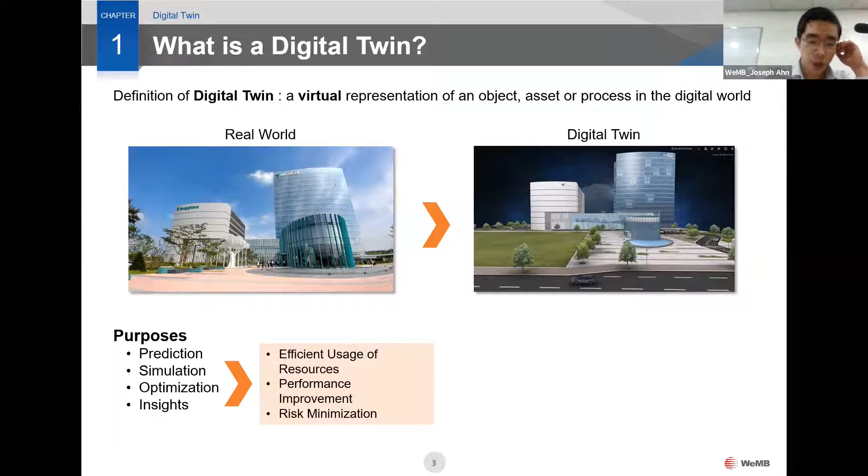Though figures are slightly different, prestigious researchers expect the digital twin market to grow 62% every year on average, with the market size reaching almost $30 billion by 2025. Among the world, the Asia Pacific market is expected to grow the most and fastest.

So, application of digital twin - where can this technology be used? Nowadays it's hard to draw a clear line. It can be used even in healthcare, hospitality, universities, etc. But the fields where the technology is most used are, no doubt, machine testing, because it started with GE, which manufactures machines, to test their performance or simulate outcomes. Also smart factory and smart building.

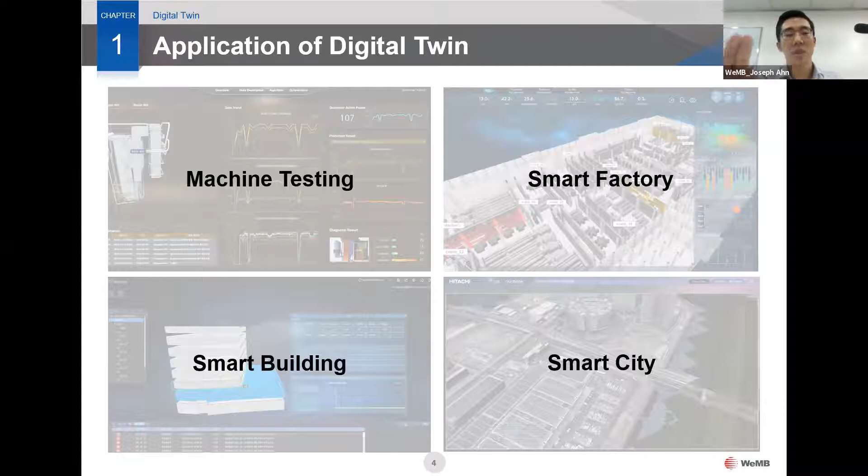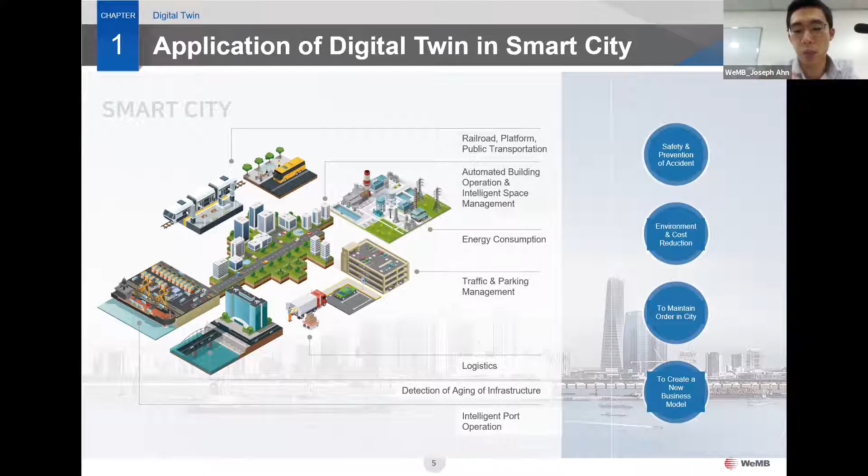It can also be used for smart city, and WeMB recently applied this technology to managing smart cities. By applying digital twin in smart city, various issues in city operation can be solved or mitigated - issues related to safety of citizens, energy consumption or efficient usage of energy, management of aging infrastructure, prevention of or response to catastrophic accidents, or optimized and efficient operation of the city, etc.

There are two fundamental elements for digital twin and supporting technologies. First, similarity - a digital twin must look the same as the real world object as much as possible, otherwise it'll cause confusion and inconvenience to use. For similarity, accurate visualization without blind spots, such as 3D modeling, is necessary.

The second is data and information. Data is the heart of the digital twin. Without data or information, a digital twin with 3D modeling only is like a car without an engine. The more and better quality data that exists, the more accurate performance and outcome can be guaranteed. For smooth data flow, network and communication technology is a foundation.

Over that foundation, Internet of Things, big data collection and processing, cloud and edge computing, and AI-backed prediction technologies are required. Among these technologies, WeMB develops and delivers solutions with a powerful 3D visualization function, as well as big data collection, data analysis, and AI-backed prediction.

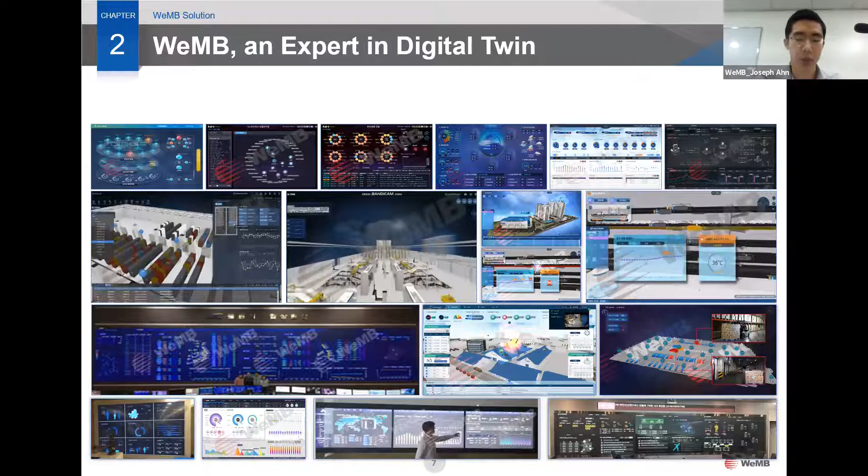Since its foundation in 2004, for 18 years, it has served over 150 customers and carried out over 500 3D digital twin projects. In the beginning, it did simple dashboards, data centers, or buildings. Now it's developing technologies and products that can be applied in more complicated environments, such as smart city, port, or infrastructure management.

Because it's software, I cannot show you a physical picture of the product, but please understand that. So to build a 3D digital twin, WeMB presents two core products: one for data collection and analysis, and the other for visualization, real-time monitoring, and simulation.

TIM, the Total Integration Manager, is a powerful data collection and analysis tool. It collects data from any data sources, such as IoT sensors, data generating equipment, or legacy systems, with simple and easy configuration. It stores the data in a data warehouse and analyzes it. Recently we also upgraded the software so it can perform big data analysis or AI-based prediction.

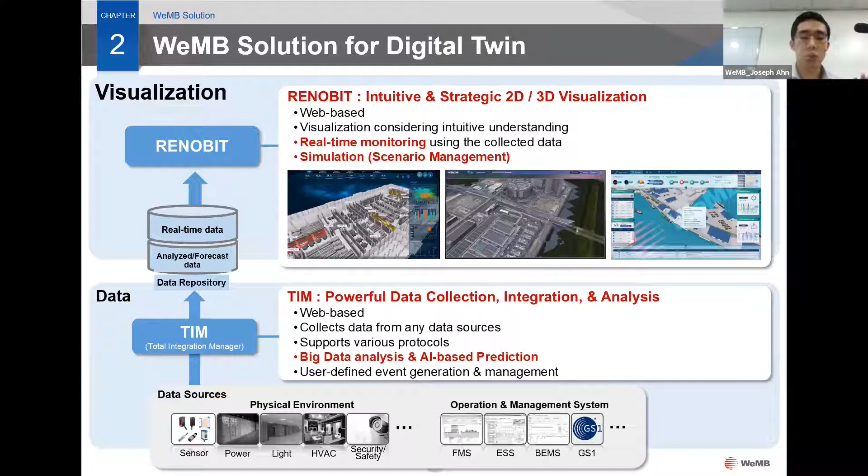Also, RENOBIT is provided with an editor, so for any environmental changes or addition of data sources, users can easily configure and maintain the system by themselves. So I'm going to briefly go through two use cases for city management with the WeMB products.

So these are a couple of pilot projects done with the WeMB products. The first case is a smart city management platform developed for the area called Toyosu in Tokyo, Japan, early this year. Due to requests by co-working partners, the version I'm presenting now is a small part of a pilot system we cooperated on with one of the biggest Japanese firms to promote the smart city management business in Japan.

The main issues to improve through the system were severe traffic congestion especially in rush hour, mobility of the disabled especially in a disaster situation, and monitoring aging infrastructure, etc. The system was developed using third-party 3D map software, with data shared by the governmental institution or participating companies, based on the WeMB solution.

Let me show you the demo video of the pilot system. So once the pilot system starts, the 3D visualized Toyosu area appears.

It was supposed to display real-time traffic flow with colored lines and parking space occupancy status, but that information was removed in this video due to the co-working partner's request. So this is the 3D visualized Toyosu area. You can see the whole city without blind spots. Once you click it, you can enter the building.

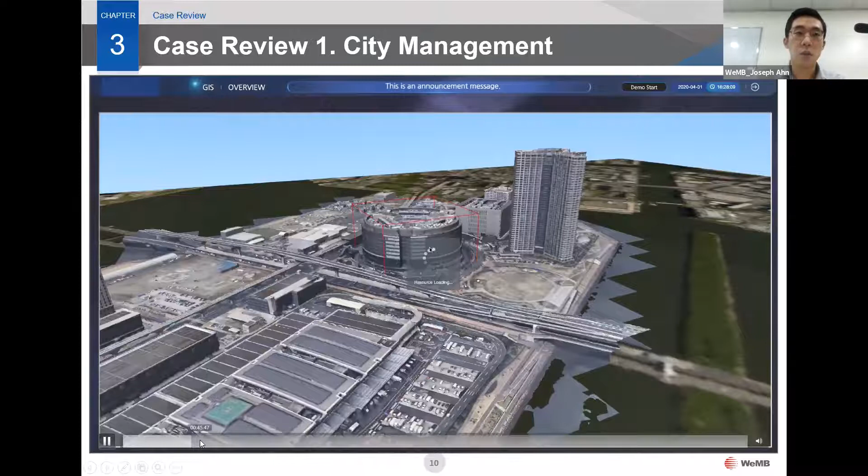So the system collects data from every sensor or system used inside the building, such as temperature or humidity sensors, leakage sensors, earthquake or fire sensors, etc. The advantage of the 3D digital twin is that it shows the exact location of the events, sensors, or equipment, so it increases the visibility for users.

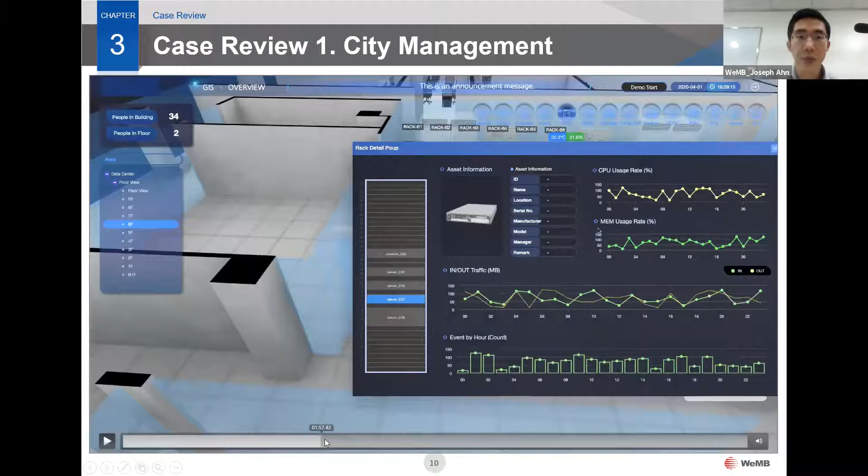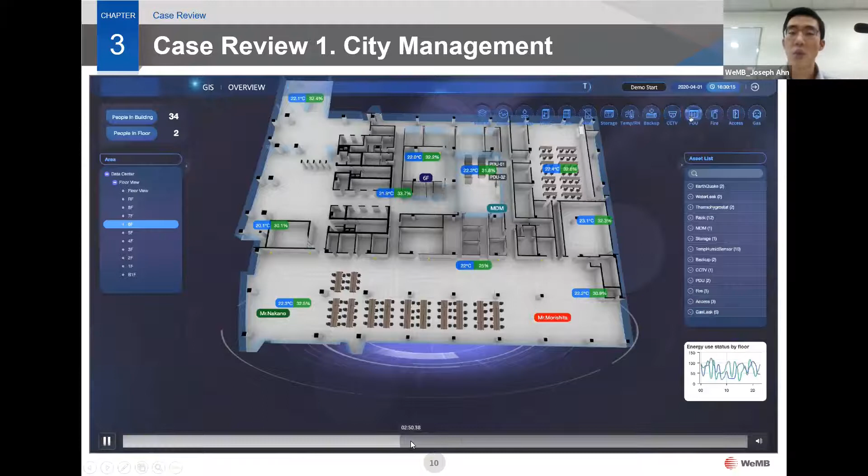I'm going to show you the purpose of this system was to tackle fire situations or any disasters and manage them in a more efficient manner.

For example, here are two persons wearing real-time location tracking sensors. The system also pinpoints the available exit, so that as Mr. Nakano with the green name tag here is moving, Mr. Morishita with the red name tag cannot, as he is disabled.

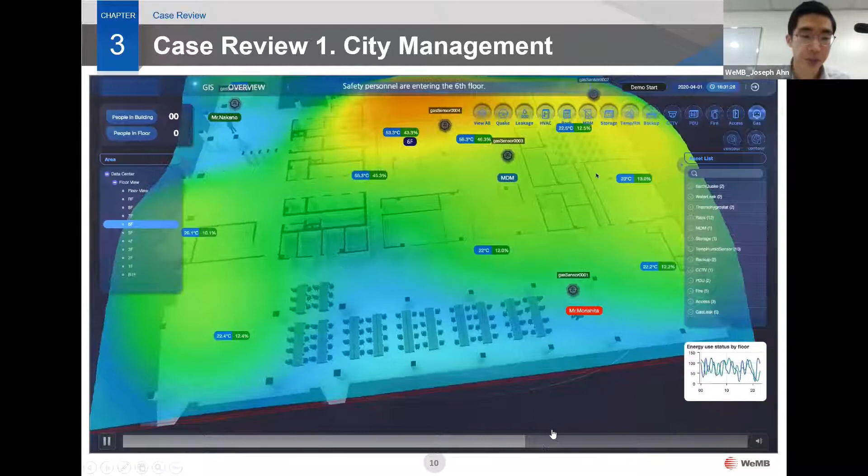However, here a certain fire sensor detects a fire event. As the system detects Mr. Morishita is disabled and cannot evacuate by himself, it alarms safety staff to notify the exact location of Mr. Morishita and approach him to rescue.

The system collects data and analyzes patterns to identify a disabled person and visually pinpoint their location to secure their safety in an emergency situation.

Because of time, I'm going to close this video, but hopefully this presentation and video can be shared after this session.

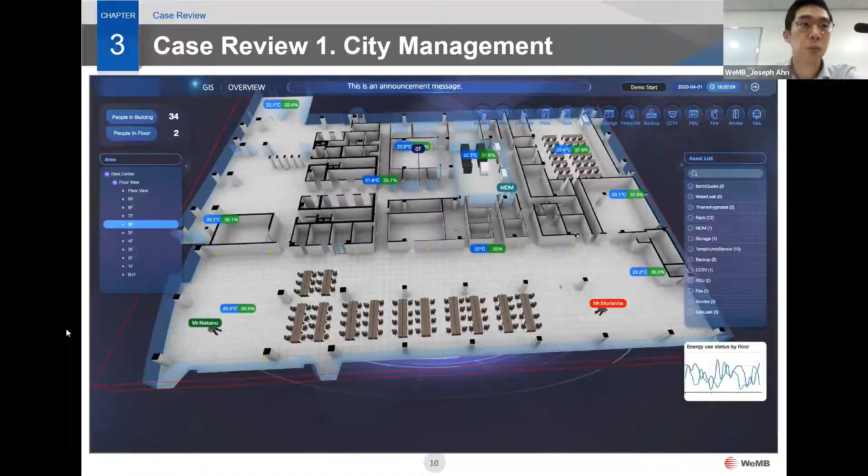The second case is port management, which is a part of the city. The version I'm presenting is also a pilot system made and tested in a mega-sized commercial port in Singapore. The main purposes of the system are monitoring major events such as fire, storm, or worker safety, and supervising vessel operations. It's also for measuring real-time KPIs to improve productivity of the port.

Sorry for the sound. Okay, so once the system starts, the 3D view of the entire port appears. The modeling was made based on an AutoCAD file with the 3D view at the center. Surrounding items show real-time KPIs about productivity, operational efficiency, major equipment status, cargo throughput status, or major events taking place in the port.

Also, with analysis of the data pattern, the system predicts throughput and productivity. Based on up-to-date data, it predicts monthly and yearly productivity, so that with this information the operator can deploy or adjust the number of workers for efficient use of human resources while increasing productivity in the port.

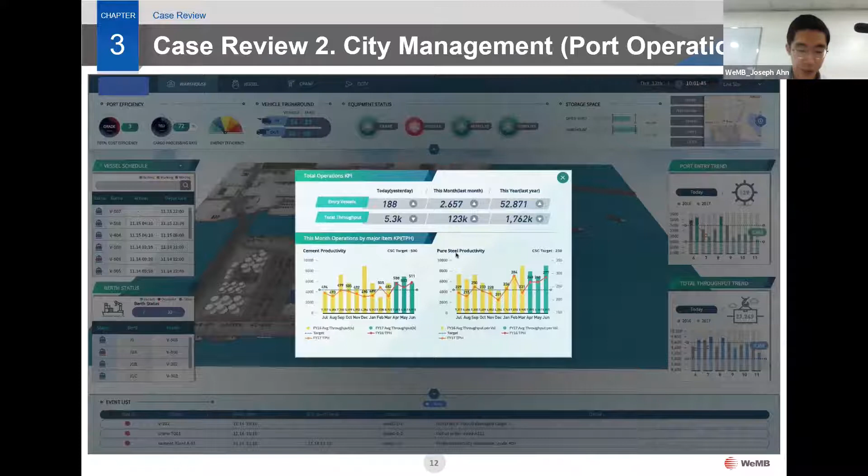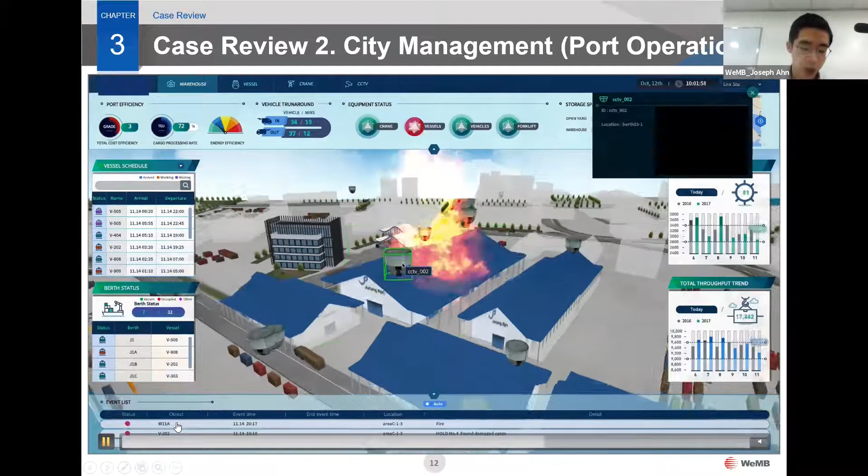Also, it shows how to deal with events such as fire or earthquake when they happen. Fire events have to be quickly and efficiently managed. So once a fire breaks out, the 3D view shows the exact fire location. On the pop-up, the operator can notify the managers, workers, and nearby fire station.

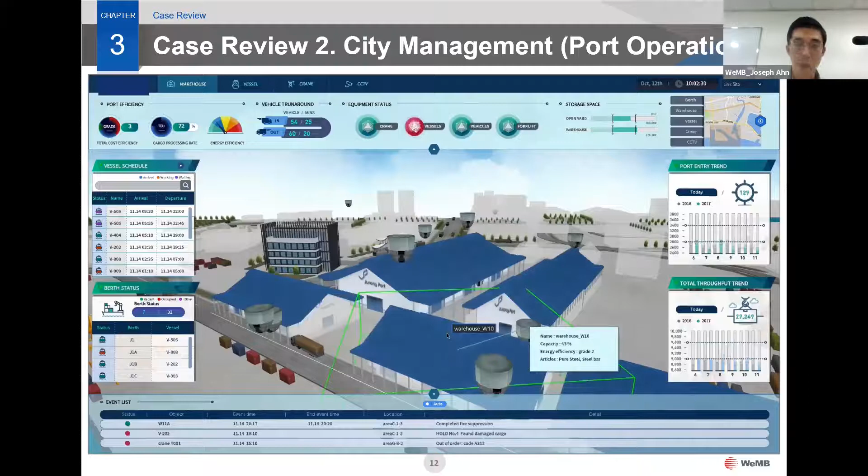Also, it can show the evacuation status of workers inside who are wearing location tracking tags. The system can also guide optimized evacuation routes based on analysis of data generated and received from sensors inside the warehouse.

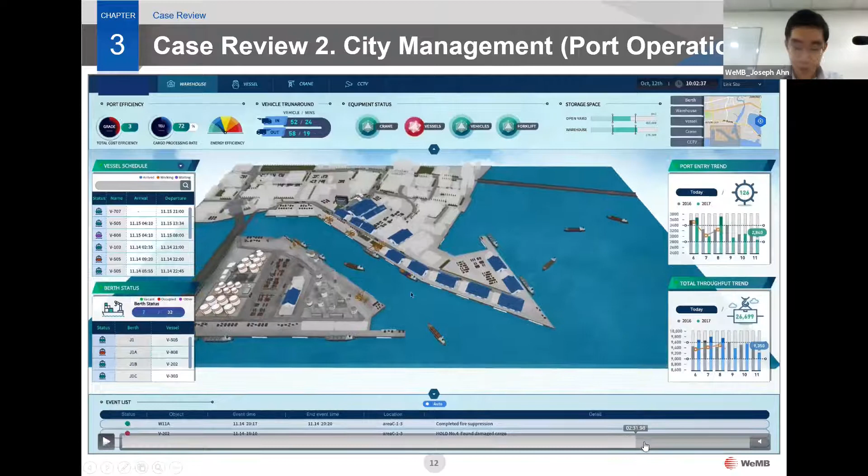In addition, the system can track and predict cargo unloading status. The operator can utilize human resources efficiently to finish the job on time.

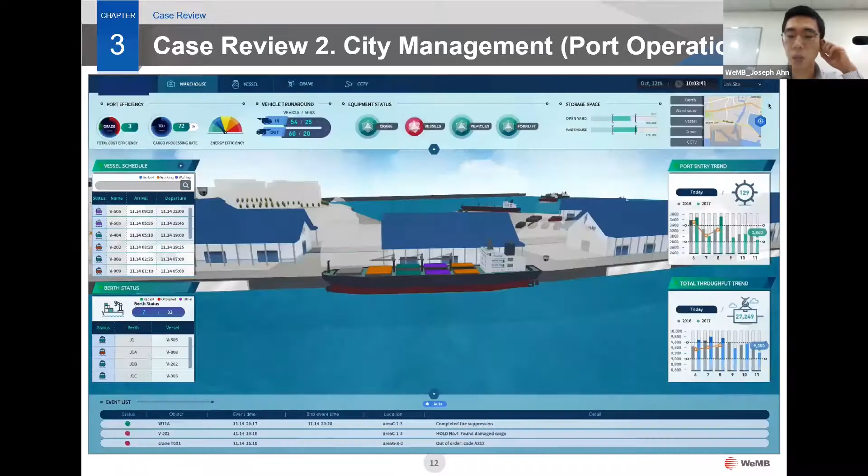So the advantages of WeMB products are powerful 3D visualization to build a digital model. It enables users to do a quicker and faster response to situations by pinpointing an exact location in the 3D digital twin. With monitoring, real-time situational awareness, and prediction functions, it can improve the management of the city and make it more efficient.

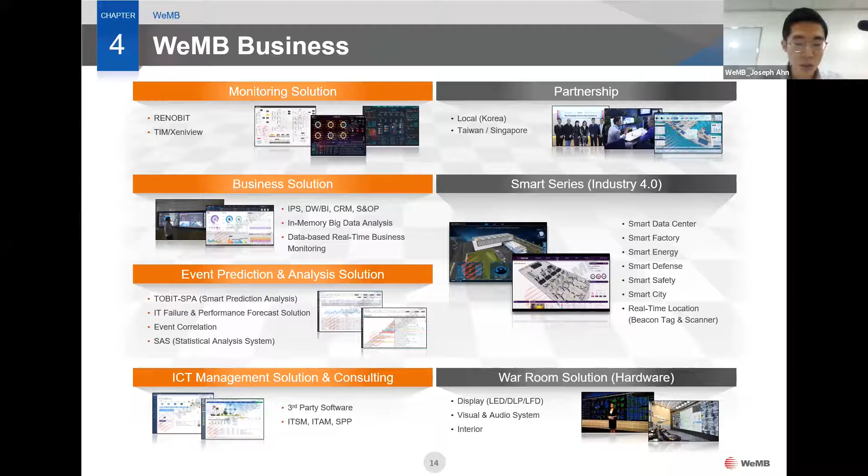The following slides are about detailed information of WeMB, but because of time I'm not sure I can touch these points. Hopefully this file can be shared after this session, or if you have a question, you can email me.